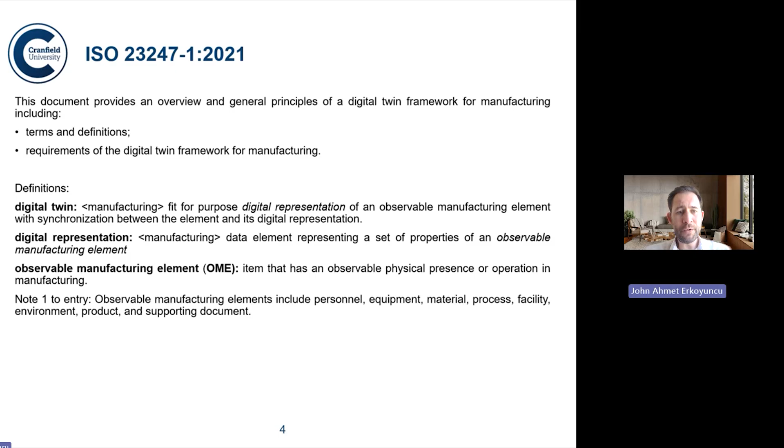So there are some ISO standard developments, and this is one version from 2021 where they define digital twin as fit for purpose digital representation of an observable manufacturing element that's synchronized between the element and its digital representation. So the word synchronization is a relatively key word there, but there are many definitions out there, and it is quite a confusing concept. And in this presentation I'll try to give some further explanations as to what's unique, what's different with digital twins.

That's the key thing. You're trying to get some value out of the system, and you're trying to improve that value over time. And you can define value in different ways. One definition could be in terms of how you measure the availability of the asset. One measure could be in terms of the outputs that you're getting from the system. So there's different ways you can define value. It depends on the asset. It depends on what you're trying to achieve. But ultimately, you're trying to improve the value that you're getting over time. So that's the role of the digital twin.

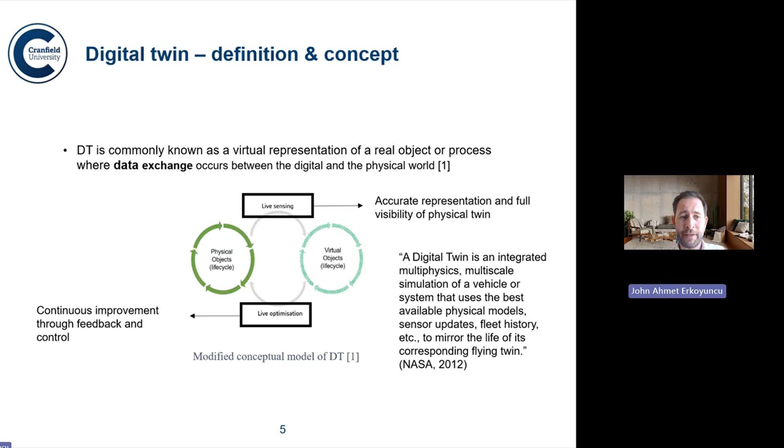So data exchange is at the heart of this. The ability to integrate data from different places is at the heart of this. There's different types of data that you're integrating. And it's very much to have a holistic understanding of the system of interest.

So over time, the model, the virtual object, and the physical object may deviate because you're going to make changes in the asset and things will evolve in the asset. And you're not necessarily feeding that back into the virtual object. So as an outcome, the model's representativeness over time may actually reduce.

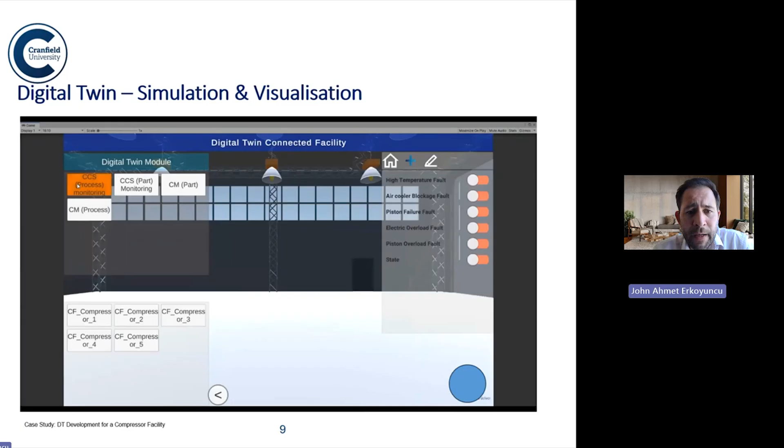So the question that we had given by industry was, how do we manage these compressors better using a digital twin? So the challenge that they had was they weren't aware of the health of the compressors to begin with. And secondly, when there were issues with the compressors, they were inefficient in responding to maintain them or repair them.

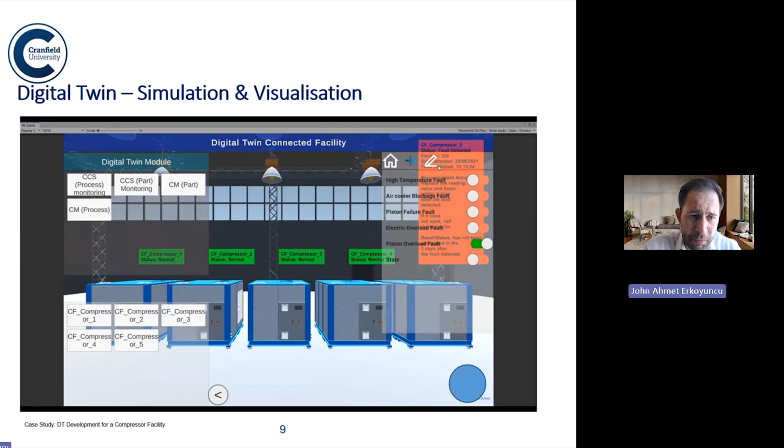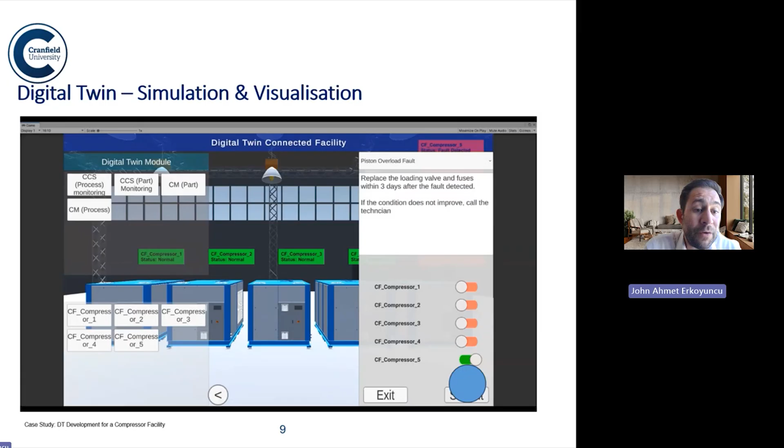So the approach we took here was we built a digital twin for the compressors for this facility, where initially we could identify the health of these compressors, and then we could characterize different types of problems that could be faced in the compressors. So this way, the system could give us some alerts before a problem is to happen. And when those alerts happen, we could give specific bespoke guidance to the maintainers that's created through the digital twin to do particular maintenance activities on the compressor.

So the key thing here is the kind of interventions are not predefined. Depending on the health of the asset, depending on the type of problem that's faced, we could create specific guidance that the maintainers could work on.

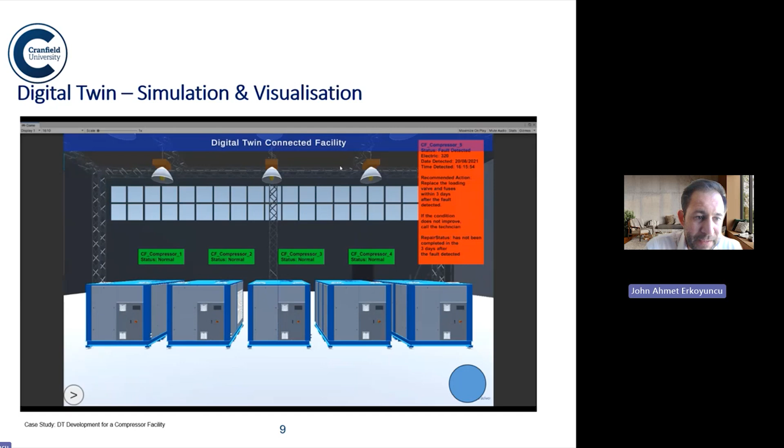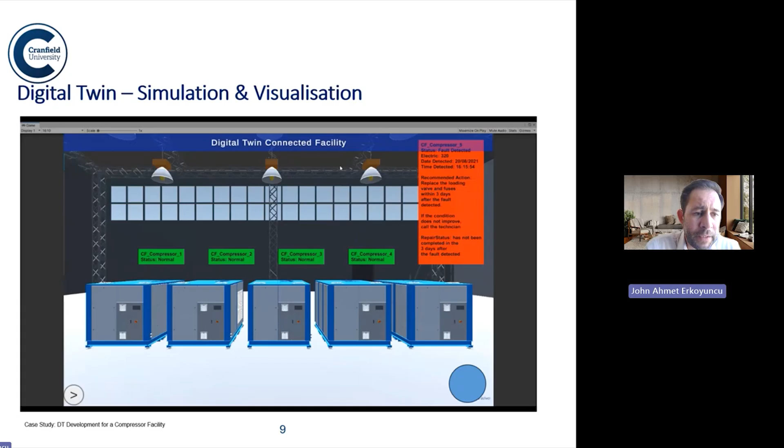So that was the digital twin example that we created. And it led to significant improvements in terms of the performance of the compressors, but also in terms of reducing failures and reducing downtime as an outcome.

So we managed data collection through Raspberry Pi. We looked at the data storage through MongoDB. The data structure was managed through Protege using ontologies. And we looked at data control aggregation through simulation methods, visualization methods, and we came up with some action recommendations from that perspective. We managed data flows through Python, and we looked at data analysis using Excel.

So the key thing here was, how do we manage interoperability between all of these different software that traditionally may not have been designed to communicate with each other? So that was a big sort of challenge that we had to deal with.

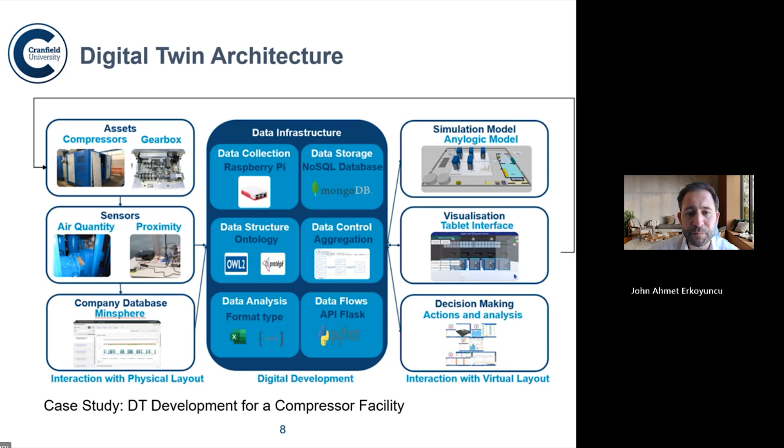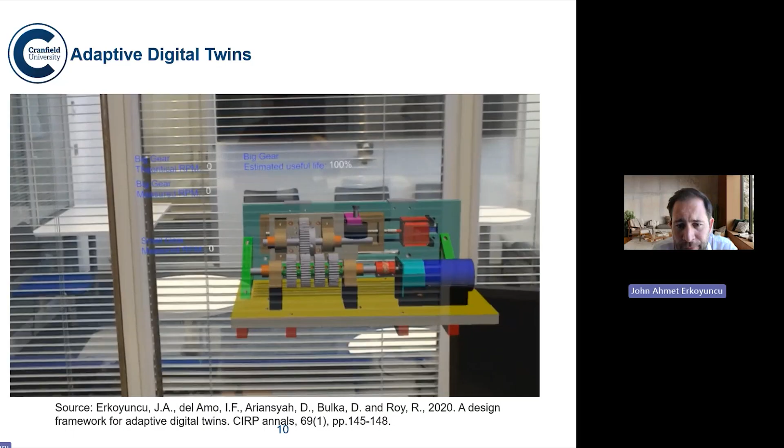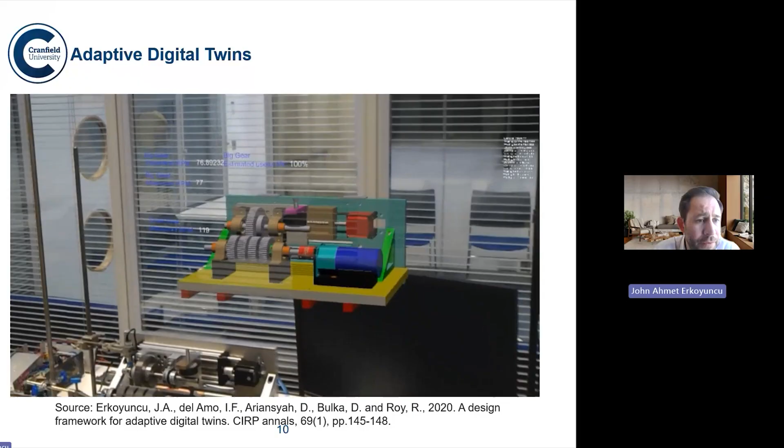So just to go to another example. So this is using a gearbox as an example. So in this context, what we wanted to do was, how does the digital twin actually evolve over time? So you can see in this context, we have the gears. The gears are changing potentially. If one gear breaks, we have to replace it, and the new gear might have some differences from the original gear. So how does the digital twin cope with those kind of deviations? That was what we were interested in.

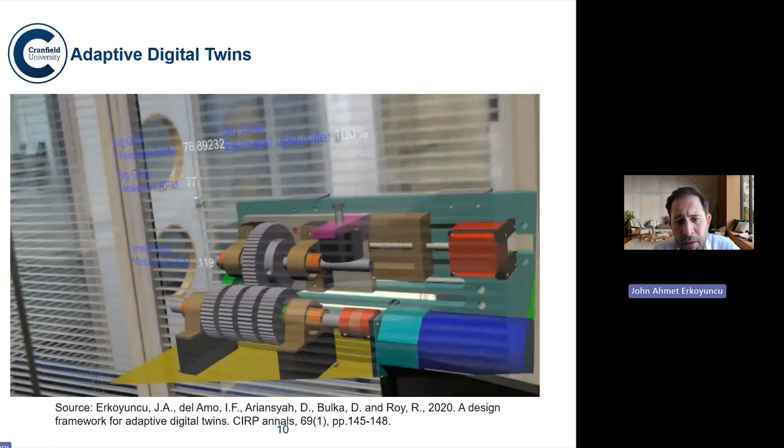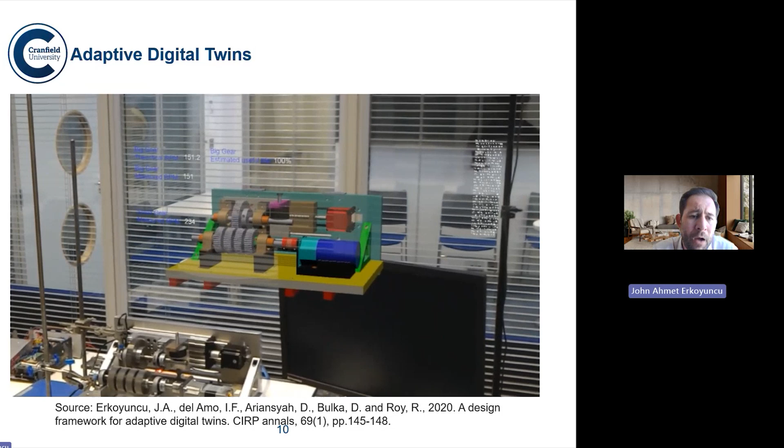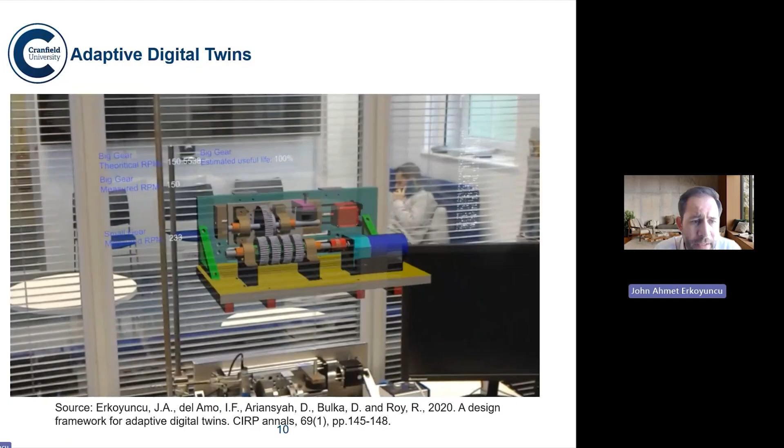And in this example, we're able to capture visually the changes in the gears. And we're also trying to realize how these gears are performing over time. And we're trying to optimize feedback back into the gearbox. The key thing there is, how do we sustain the life cycle? How do we start to get the performance levels that we want? And the digital twin is giving feedback back into the gears to ensure that we are able to sustain those targets.

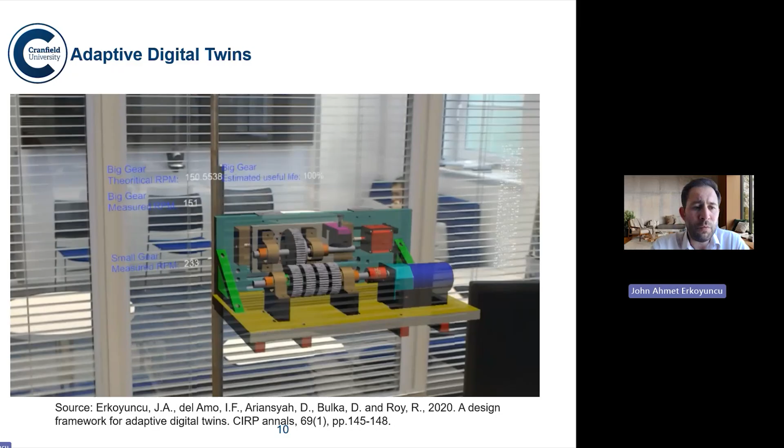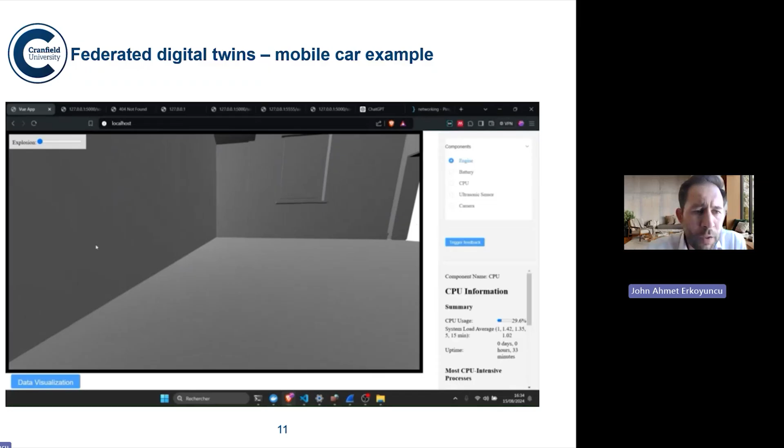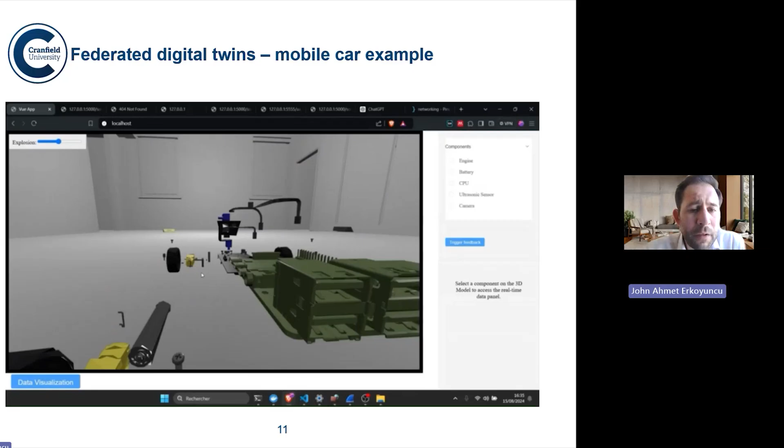Here's another example. So the kind of question here we were asking was, how do we build federated digital twins? And this concept is about having more than one digital twin. How do we start to have these different digital twins communicating with each other? And the example we've used here is small mobile cars. And we're trying to here illustrate that each car is a digital twin in its own right.

So I think the concept of federated is very interesting and very much crucial, as then in that context, we can start to deal with much more complex questions. And as we move up that complexity, the value that we can get from digital twins will increase. So that's, again, a critical consideration, because we need to think about value. Ultimately, when you're choosing the use case, when you're choosing where a digital twin should be used, the value you're creating is going to be a primary driver.

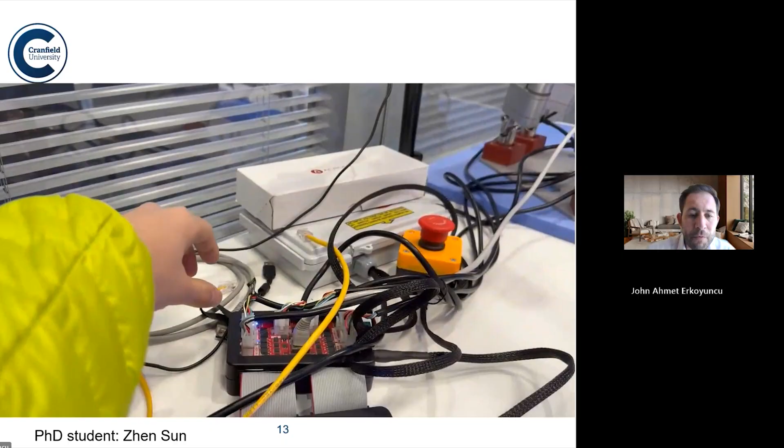And the digital twin is trying to realize if there is a problem, how does it self-adapt? And you can see we've just removed the cable. One of the legs has stopped working, but the other legs have taken on additional pressure. And that's how the digital twin has reacted, has responded to ensure that the ball doesn't fall off this system. So it's a digital twin illustration, and it's demonstrating how we can have resilience in the digital twin.

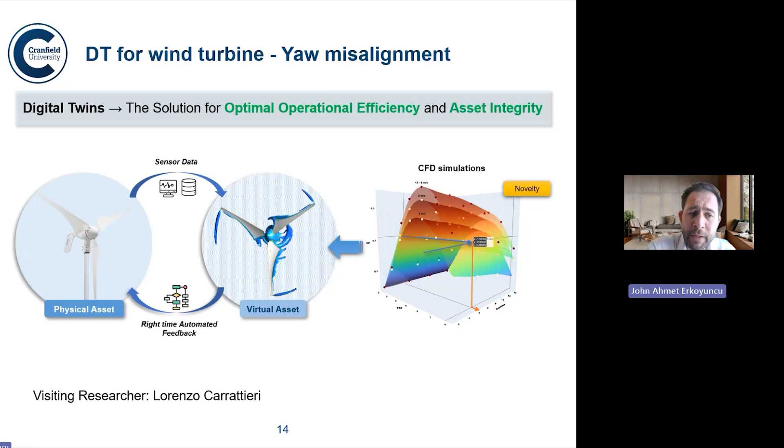We've also been looking at wind turbines. I think the interesting thing about wind turbines is that the weather conditions are very dynamic. And you can see in this example, I'll just pause. We're trying to see how the wind is adjusting the wind turbine.

So the kind of project is in terms of how the digital twin can realize if our sensing, so traditionally, there'll be some sensors trying to guide the wind turbine in terms of how we will optimize the energy production. So misalignment causes inefficiencies in terms of the energy production. So if there's a problem with the sensor that helps with determining the alignment, then we're going to have suboptimal energy production.

So for us, what we did here was the digital twin realizes if the sensor has stopped working. And by realizing that, it's able to start to predict. And that's what it's trying to do, really predict the different wind conditions and give feedback in terms of what's the best position for the turbines. So again, a very useful, let's say, industry relevant demonstrator where digital twins are helping to optimize energy production.

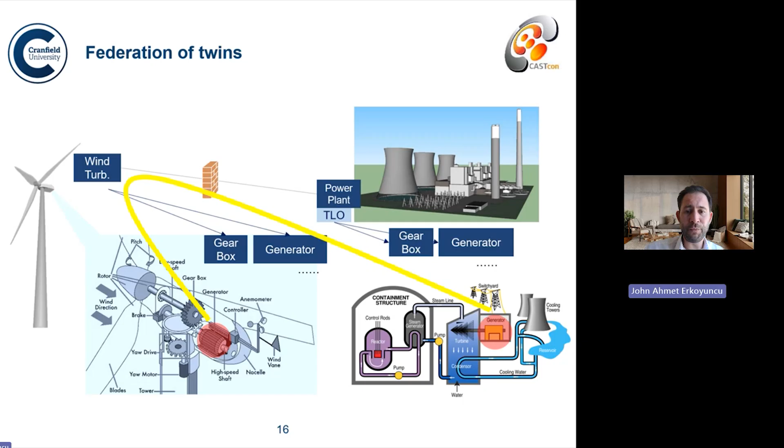And I guess there's another big opportunity in terms of how do we actually integrate across the supply chains? And I think the other exciting concept here is how do we integrate across the supply chain and across the life cycle? So if I look at the suppliers, they're producing raw material, they're producing different types of components that are feeding into the manufacturer. And if we had a digital twin of the suppliers, we could start to see what happens if we've got some delays. How does that affect the operations in the factory?

If we had a digital twin of the factory, we could start to connect that to our warehouses so that we've got a better idea of what we need to store, when we need to store. And then once we have the warehouse digital twin, we could then say, how do we now communicate with the distributors? How can we improve the efficiency of transport? And then lastly, how do we bring these different assets to the customers in a timely way?

So the exciting thing here is if we had all these multiple digital twins, ultimately these could communicate with each other and we could build an integrated supply chain. So this is one of the big challenges pretty much most sectors have, where supply chains are not integrated, which leads to inefficiencies, and it leads to assets maybe costing more to produce, or there are delays in the production processes. So digital twins could have a big role in creating these integrations.

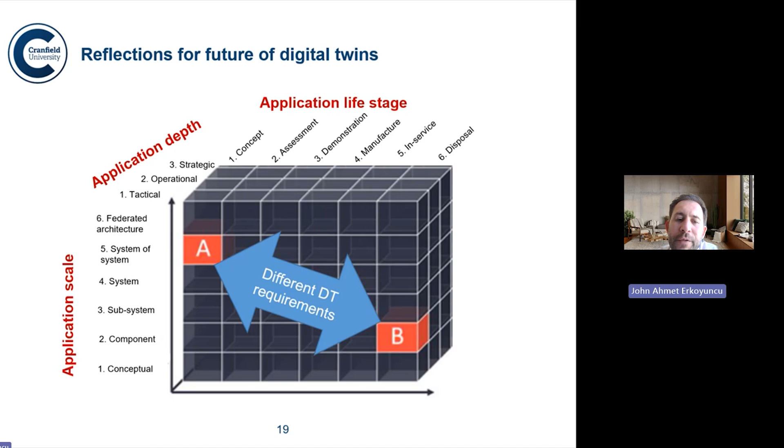I think we're going to be moving more and more towards federated architectures, and we're going to see much more integration across the life cycle. And I think digital twins will play a big role in terms of the process for integrating these different perspectives.

So just to highlight some conclusions, there are many opportunities with digital twins. I think we need to understand what sort of characteristics digital twins have. They offer being responsive. They offer being interconnected. They could help with removing silos in terms of different systems, potentially across the life cycle. By having a common, maybe data architecture or common interoperability approach, you can start to remove silos and improve the confidence in terms of how you represent a system.

Predictive is also an opportunity in the sense of by having a better understanding of the system, you should be able to improve your predictiveness and, as an outcome, you can improve the performance and optimization of the physical system that you're interested in. So there are many opportunities, and I think moving forward, we need the digital twins to find the right use cases and to demonstrate that they actually can add value and make some significant improvements in the systems that they represent.

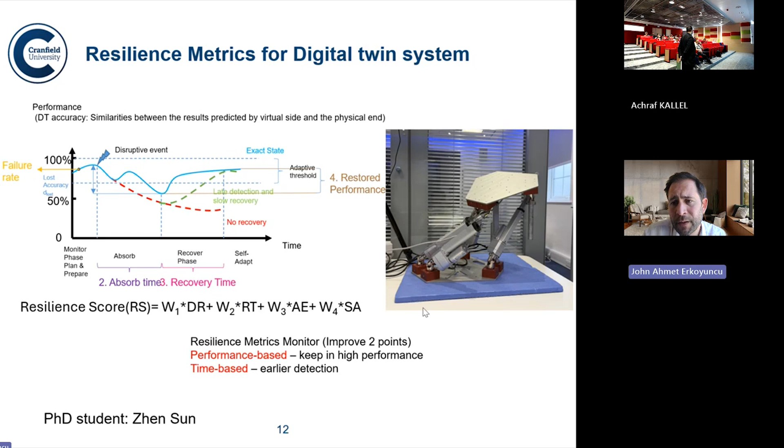And the second one is a master's course where we're very much focusing on digitalization and digital twins. For me, the skills needs are very much the whole journey. How do we take an integrated approach? Because just trying to have good quality data is not enough. Just trying to have good analytics is not enough. How we connect data to models, to visualization, how we have each of these things at a good level. You need to think of this in a holistic way.

And I think that's what's different. Because if we look at traditional education, we focused a lot on maybe sensing, or on good modeling methods. But the difference here is we need all of these things. We need these to connect. We need these things to work in a seamless way and to provide that feedback back into the physical system. And we haven't done these things before. To me, it's a significant change in the way we manage assets.

So yeah, it's very exciting in terms of education and skills development, because I think if we get this right, the impact in industry could be significant.